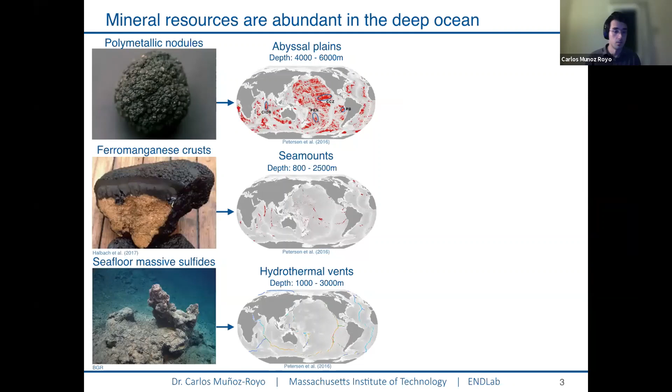As you may well know, mineral resources are abundant in the deep ocean. Currently, there are 3 main types of resources being considered for potential commercial exploitation: polymetallic nodules, ferromanganese crusts, and seafloor massive sulfides. But today we're here to talk about nodules. Nodules are rocks with a size between 1 to 25 centimeters, and they contain manganese, nickel, copper, cobalt, and other trace metals. They're found in abyssal plains in oceans all around the world, lying on top of a layer of very soft sediment.

I think you may be able to see my video. I have here a sample of sediment taken from a potential deep sea nodule mining exploration area, a bottle of water with some sediment at the bottom. This sediment is characterized by the cohesivity of the particles. This means that sediment particles tend to stick together to form larger aggregates. This is why when I tip this bottle, the sediment behaves like a gel. But if I shake it, I'm able to break all those aggregates and get all the sediment in suspension.

There are many reasons why nodules have brought so much attention in the last few decades, and one of them is the vast amount of resources available in the deep ocean. For you to have an idea, in the Clarion-Clarion-Clipperton fracture zone, an area in the Pacific Ocean between Mexico and Hawaii, there is more manganese, nickel, and cobalt than in the currently estimated land-based resources.

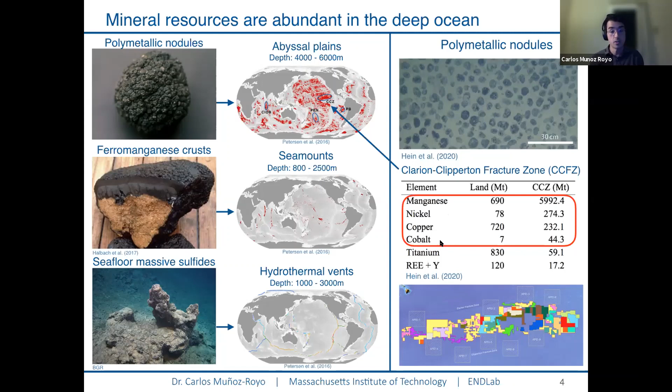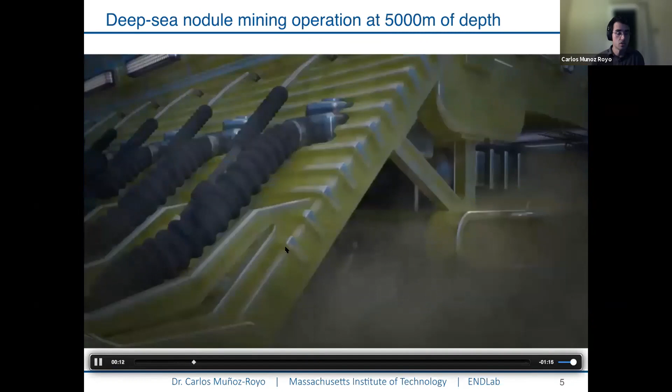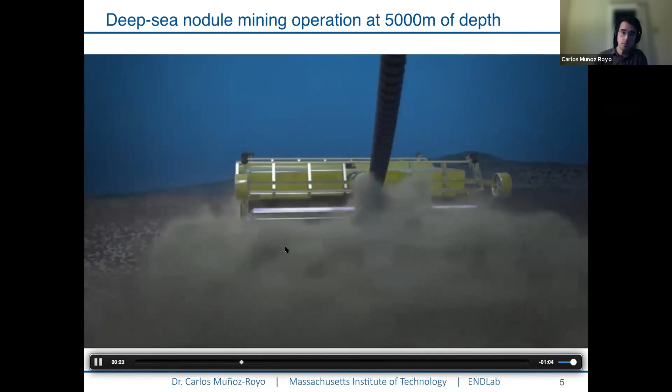So let's take a look at what a nodule mining operation looks like. This is a nodule collector vehicle being deployed from a nodule mining vessel at the ocean surface. At the front, the vehicle has a nodule collection system that consists of a number of water jets that inject water at high velocity to pick up the nodules. But apart from the nodules, they also pick up a certain amount of seabed sediment.

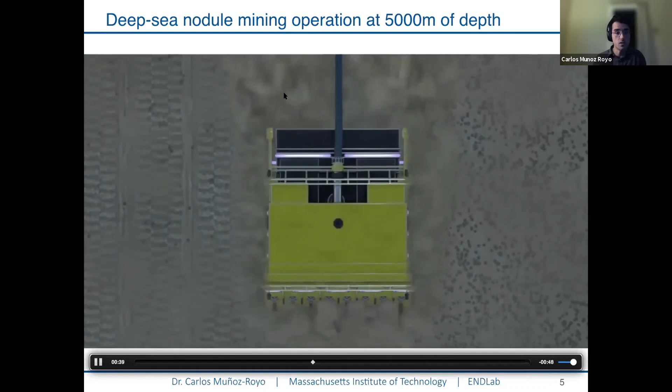As they don't want that sediment, most of it is separated from the nodules in the collector vehicle itself, and it discharges right at the back of the collector vehicle, as you see in this animation, creating what we call the collector sediment plume. This is a sediment release that happens close to the seabed in the abyssal plains.

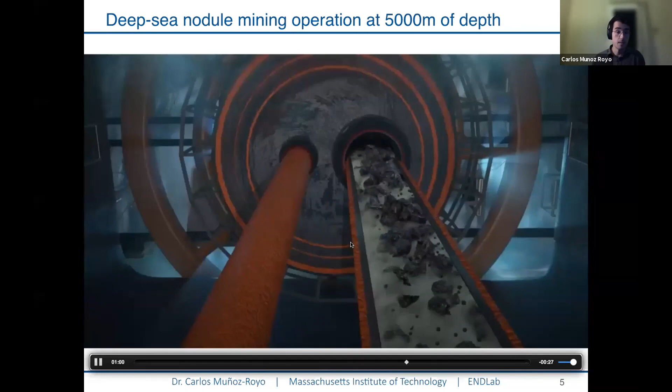The remaining fraction of the sediment is lifted up to the mining vessel together with the nodules, and there the nodules and the sediment are separated, and the sediment together with the water and some very fine nodule particles, which result from the erosion of the nodules as they go up, are discharged back to the ocean.

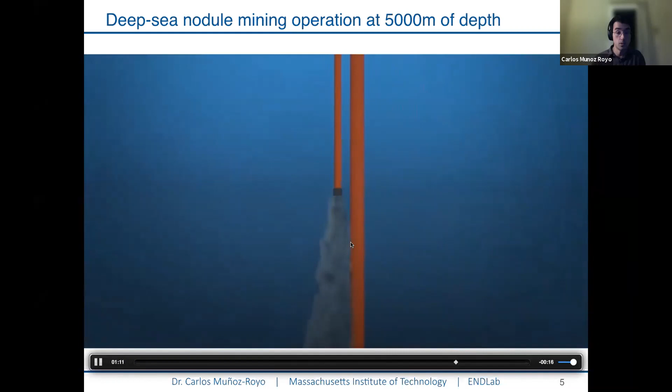And in this case, in this animation, we have a discharge in the midwater column of the ocean, but the reality is that it is not yet clear at which depth these sediment plumes may be released, may be discharged. So we have two main options. The first one is what we will be talking about today, which is a midwater column discharge.

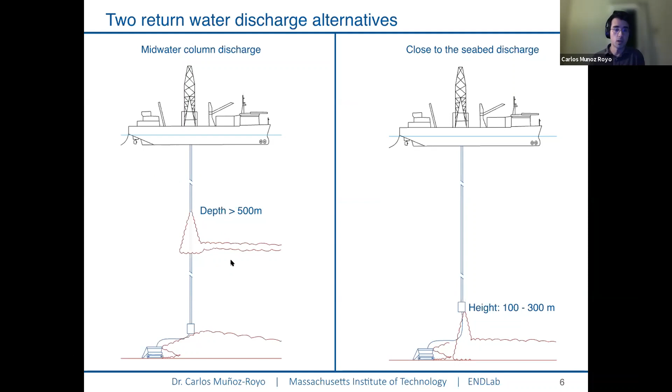So the sediment is expected to potentially be discharged at a depth probably greater than 500 meters. Some other places they are talking about depths greater than 1,000 meters, but that's still to be defined. And the one potential alternative would be to discharge this same sediment closer to the seabed. But as I've said, it is still unclear what will be the final solution that will be adopted. So today we'll be talking about midwater column discharge sediment plumes.

So let's start first talking about why these sediment plumes are relevant. And to do that, we need to differentiate the direct and the indirect environmental impact associated with nodule mining activities. The direct environmental impact is caused by the collector vehicle itself, by just driving on the seabed and picking up the nodules, which constitute the hard substrate, and also remove part of the top seabed sediment layer.

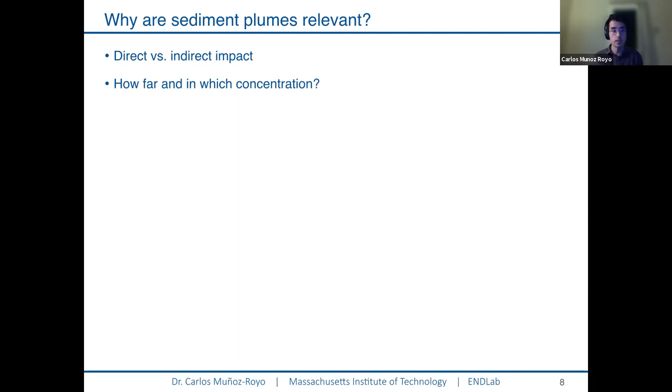But as we've seen in the animation, the sediment is then discharged back to the ocean, and the ocean currents transport these sediment plumes away from the mining area, creating what is known as the indirect environmental impact. So that sediment is creating an environmental impact away from the actual mining area. So the question we're trying to answer is how far and in which concentration do these sediment plumes actually travel, so that we can better assess the extent of impact of this type of nodule mining activities.

And the challenge comes when we start thinking about the length and time scales that are relevant in this problem, because we need to study and understand the behavior of micron-scale sediment particles, but we also need to consider larger-scale flow features like mesoscale eddies, which may have typical length scales of about 100 kilometers. So right there in this problem, we have over 11 to 12 orders of magnitude involved.

And we have a similar situation with time. We have very fast turbulent processes that happen close to the discharge of this sediment plume. But we also need to consider the overall duration of these nodule mining operations, which may last for about 20 to 25 years. Therefore, as you would expect, there is no numerical or analytical model that is actually able to resolve such a wide range of time and length scales.

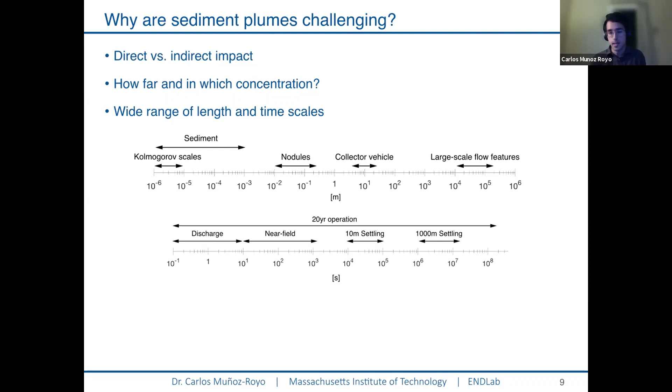And therefore, all the previous modeling attempts have had to compromise in different ways, either using low temporal and spatial resolutions, or making some strong assumptions on the initial conditions, on the source conditions of this discharge. And therefore, this is the main reason why we've decided to shift to what we call a multi-scale and multidisciplinary approach. So here we recognize that we need to identify and understand the relevant length scales and use appropriate models to study them, and then put everything back together to actually be able to get the overall picture and have a good understanding on how these plumes behave.

And a key component of this approach is to conduct large-scale field studies in which we release sediment plumes in the same dynamic regime as what is expected for a commercial operation. So we've conducted 2 large-scale studies. One was the plume field studies, in which for the first time we discharged a sediment plume using actual sediment from a nodule mining area in the Pacific Ocean, and monitored it in order to validate our modeling approach. And I'll be talking a bit more about those experiments.

And more recently this year, we were also involved in the field studies of the collector sediment plume, so the actual sediment plume that is discharged by the collector vehicle very close to the seabed during the technical trials of a nodule prototype collector that was tested earlier this year in the Clarion-Clipperton fracture zone in the German and Belgian exploration areas.

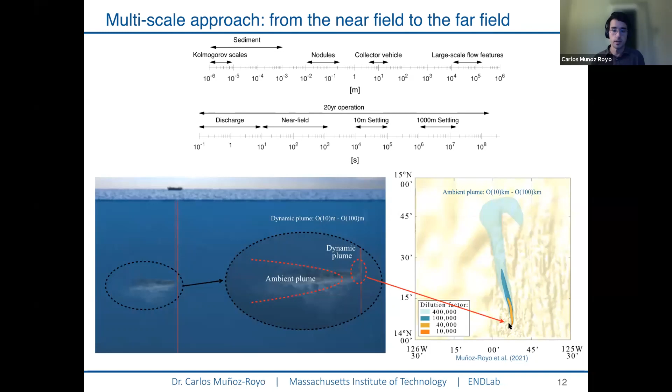background ocean water. So basically, we need to first get a good handle, a good understanding, and develop the modeling capabilities to be able to assess and understand what happens in the dynamic plume regime, so that then we can use that to inform and to set the source conditions of a larger scale ambient plume model, as is the case of the figure that we have here at the right hand side. This is from a numerical model of a region of the ocean in the Pacific, and we are actually using the dynamic plume model to set the source conditions for this ambient plume.

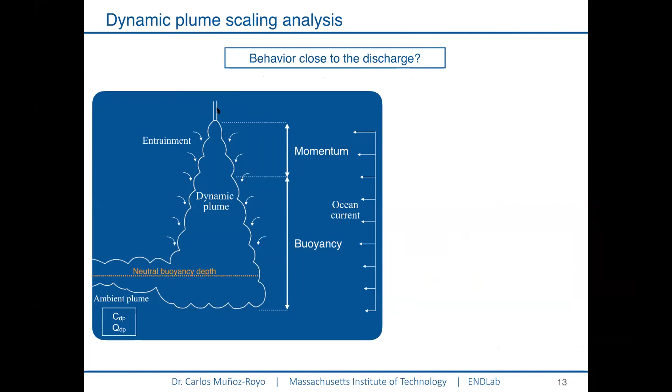So let's take a close look at how plumes behave close to the release point. So basically, we're considering the discharge of a sediment-laden fluid that initially has some vertical velocity and vertical momentum going down, and it also has a negative buoyancy. So the sediment-laden fluid is denser than the background ocean water. This results in this sediment plume continuously going down, increasing in depth.

And at the same time, because of the turbulent nature of this discharge, there is a lot of mixing, a lot of what we call entrainment of background ocean water that mixes with the sediment-laden fluid that has been discharged. This results in a decreasing concentration of the sediment in a relatively short time and length scale within this dynamic plume regime. So as you may know, in the ocean, the density of the ocean water increases with depth. This is what we call the ocean stratification.

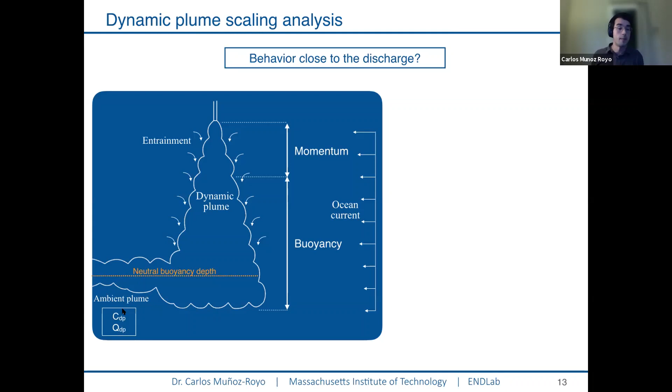So because of the initially negative buoyancy, the plume keeps going down until it reaches what we call the neutral buoyancy level. At that point, our sediment-laden fluid has the same density as the background ocean water, but it still has some vertical velocity, vertical momentum. So it overshoots, it goes deeper than that. But at that point, it starts being positively buoyant, so it slows down and it kind of rebounds to reach this final neutral buoyancy depth that we have here, and to transition then into the ambient plume phase that we've been discussing.

So the main implication from this behavior is that the initial conditions of the ambient plume, which in the end is what we care about, because this is what the ocean currents will transport away from the mining area, are basically set by how much sediment and nodule fines are discharged into the ocean, and are also influenced by the background ocean stratification, by how fast the density of the background ocean water increases with depth. And the main result of this is also that there is no influence from the initial volume and momentum fluxes.

So this means that if we are discharging a certain amount of sediment in terms of kilograms per second, let's say, it doesn't really matter if we discharge it very concentrated with not so much water, or if we discharge it initially much more diluted with a significantly higher water volume flux. In the end, the initial ambient plume conditions are going to be pretty much the same.

And the good news here is that there are very well established models that have been developed in the last decades in the fluid dynamics field for different applications to study discharges that have this type of physics involved. These models and some of their underlying assumptions have been validated mostly in laboratory studies, and also in some cases in larger scale field studies for specific applications. But there was no previous validation of this type of models in the exact same dynamic regime as what we expect for a nodule mining operation, and using actual cohesive sediment from a nodule mining area.

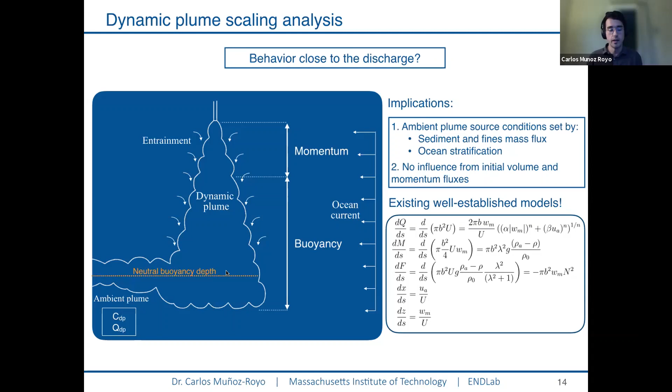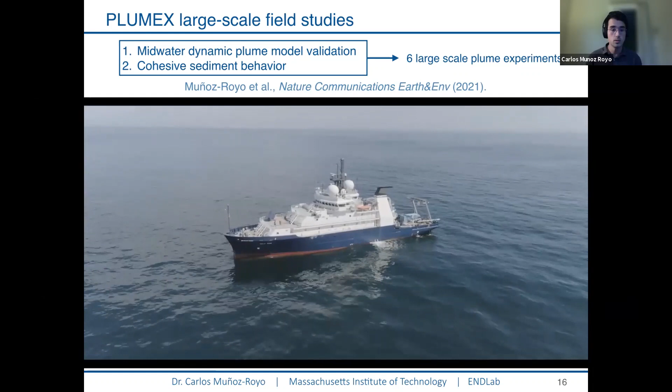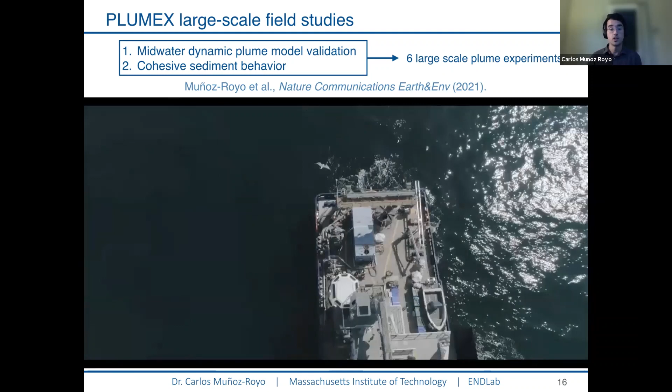So this is what we did in collaboration with the Scripps Institution of Oceanography and USGS. We went out to the Pacific Ocean aboard research vessel Sally Ride and conducted large-scale field studies of these plumes to observe and monitor them in order to first validate our dynamic plume models, and then to also assess the effect of the cohesive sediment on the overall behavior of these dynamic plumes. It was recently published, so you can look at our review.

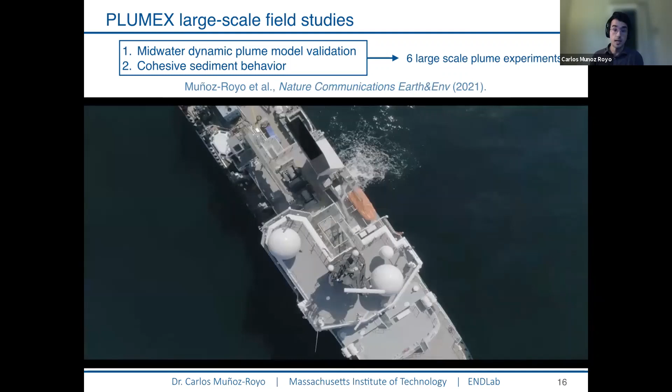So, as I've said, the most relevant aspect and a nice thing from the fluid dynamics is that we just need to make sure that our discharge was in the exact same dynamic regime as what is expected for a commercial operation. So we can make sure that this is the case by just making sure that these three non-dimensional numbers, like the Richardson number and the buoyancy number, are in the same regime, indicate that we are in the same regime as what we expect for a commercial scale reference plume, which is what we have in this column. So then, based on those parameters, we're able to set the discharge conditions of our sediment plume.

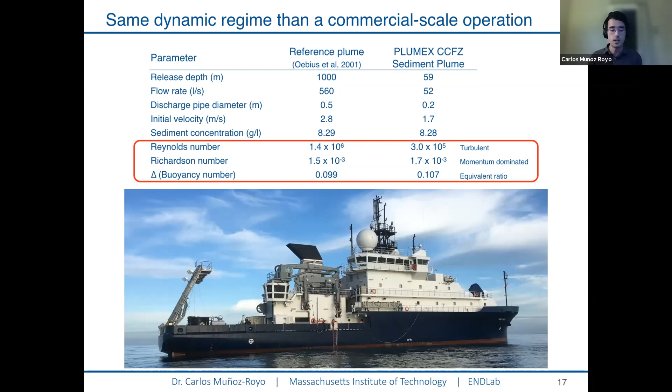And if our models are doing a good job for our experimental plume, we are certain that they will do a good job for a commercial scale discharge, because we are making sure that we're in the same dynamic regime and the relevant physical processes are present in our experimental plume. The next thing we did was to design a plume creation system, which consisted of 2 large tanks and 2 pumps. And this enabled us to have a good control of the initial conditions of the plume discharge that we were conducting at that time.

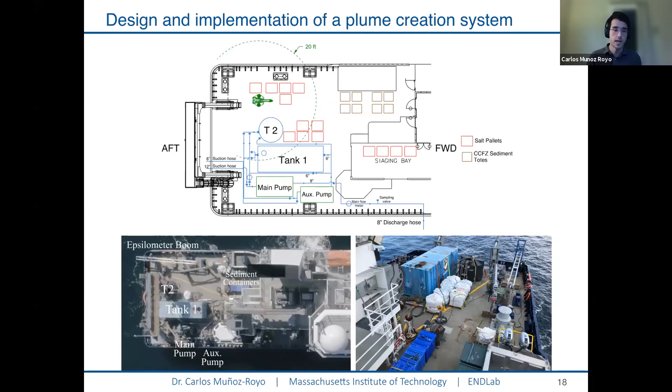Regarding the instrumentation for the dynamic plume, we relied on 3 main instruments. First, we had an epsilometer, which is a fast vertical profiler that was going up and down about 30 meters away from the discharge. This profiler was developed by Scripps Institution of Oceanography by the group led by Professor Matthew Alford. And on it, we had a CTD and optical backscatter sensor to detect the sediment, and a fluorometer, because on all our discharges, we were also adding rhodamine dye in order to trace the water. So that way we were able to independently track both the sediment and the water that was being discharged. And we also had a turbulence sensor.

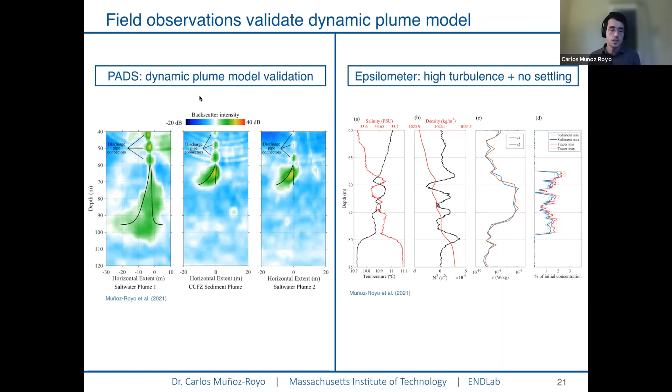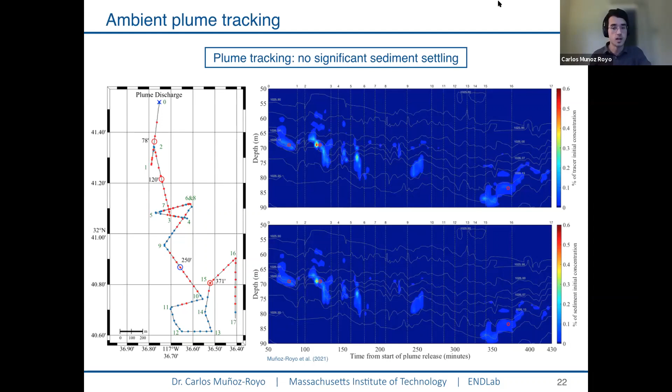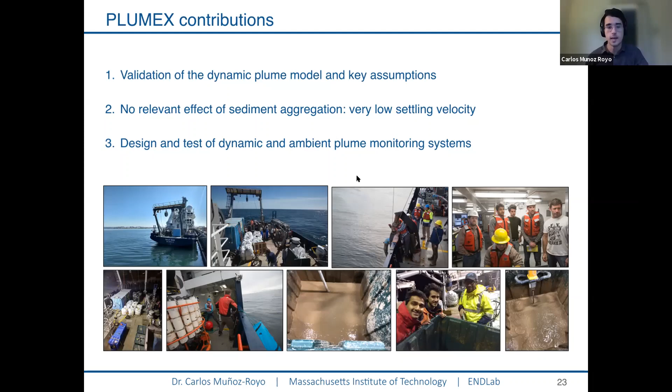Initially because of the high turbulence, and after that because of the low concentration, particles do not really form large aggregates with high settling velocities. And this is what we are observing here. So overall, through our large-scale field studies, we were able to validate our dynamic plume model and some of the key underlying assumptions. We observed that sediment aggregation was not relevant in the case of this type of plume discharge. And we were also able to test our dynamic and ambient plume monitoring system successfully.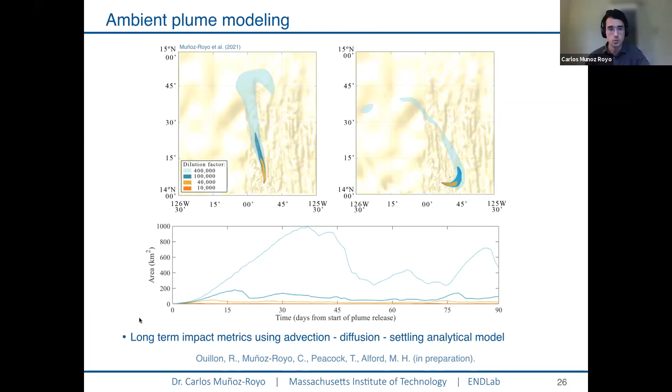So just to wrap up, throughout the presentation, we've seen that, yes, we know how these midwater sediment plumes behave. We've been able to validate the dynamic plume model, what happens very close to the discharge, and we developed the capabilities to model these ambient plumes at a larger scale, spatially, and also temporally, thanks to analytical modeling approaches that we are working on right now.

But of course, as I've said, we need to know the specifics of the operation that is going to happen, and there are still lots of engineering, technical and design parameters that have a lot of influence on the initial sediment discharge conditions, such as how much sediment is going to be discharged, what is going to be the discharge depth, and all that needs to be factored into the tools that we've been developing.

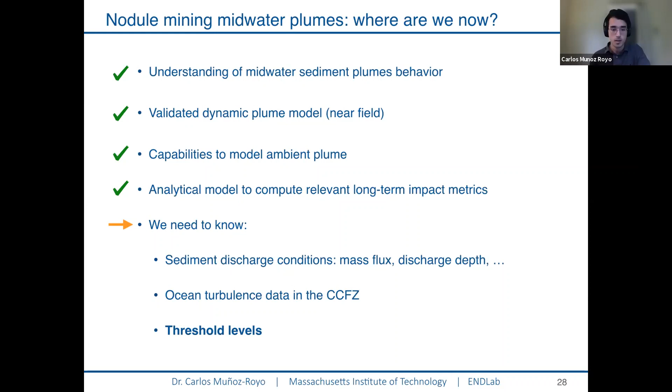We also need to get more data about the ocean turbulence, which is scarce in this area of the Clarion-Clipperton fracture zone, and especially in the midwater column. And as I've said, we also need to have a better understanding of what sediment concentration is considered impactful, and what is this threshold level, which in the end is what sets the actual extent of the impact by these sediment plumes. So that's it from my side, and I'm happy to take any questions.

Brilliant. Thank you very much. That was super interesting. It looks like a really fun experiment. So well done for pulling that one off. We're really a bit short on time. So if we have a quick question, please raise your hand. And otherwise, I would suggest we move on to Melissa. Do I see? Yes. Oh no, Lisa is clapping. Yeah, we have one hand, two hands. I can't see who raised the hand. Was it Tyson? Yeah. Hello. Hi. Can you hear me? Yes, perfectly.

So, yeah, this is a great study here, validated with this instrumentation. And I understand the instrumentation for monitoring the plume is also newly developed. It's state of the art. Could you tell us a little bit more about that instrumentation and what it is? And then the other thing is midwater plumes are probably the most difficult to model, but have you already accomplished modeling of the plume at the seabed, or is that not important to monitor?

Brilliant. Thank you very much, Carlos. That's great.